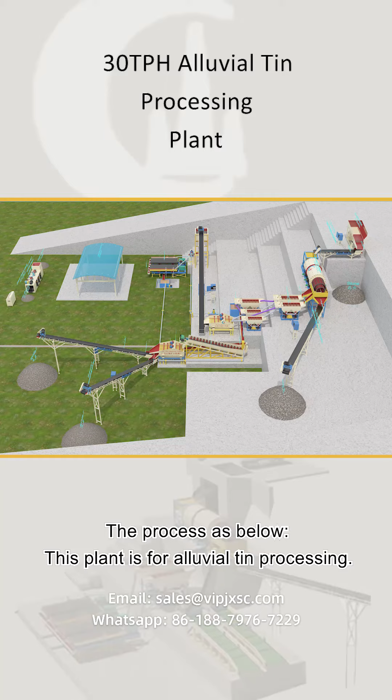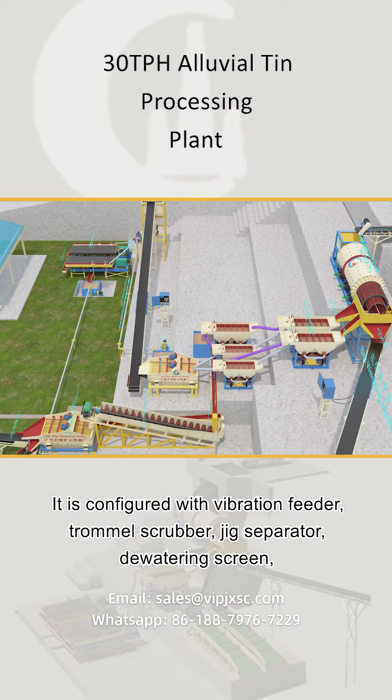The process is as below. This plant is for alluvial tin processing. It is configured with vibration feeder, trommel scrubber, jig separator, dewatering screen, hammer crusher, shaking table, spiral dewatering machine, high-frequency vibration screen, 3-disc dry magnetic separator, and belt conveyor, etc.

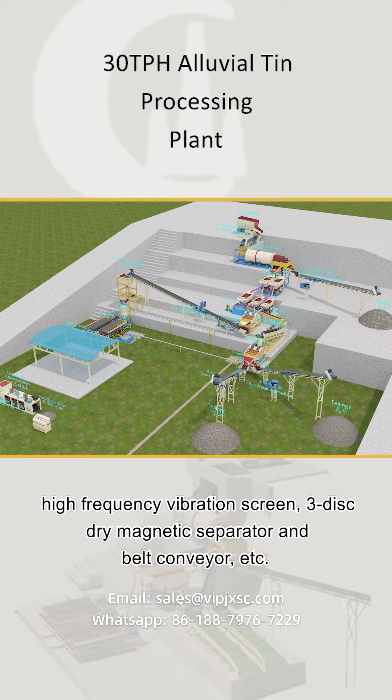This plant is designed with 30 TPH input feeding capacity. We can also design with 50 TPH, 100 TPH, etc.

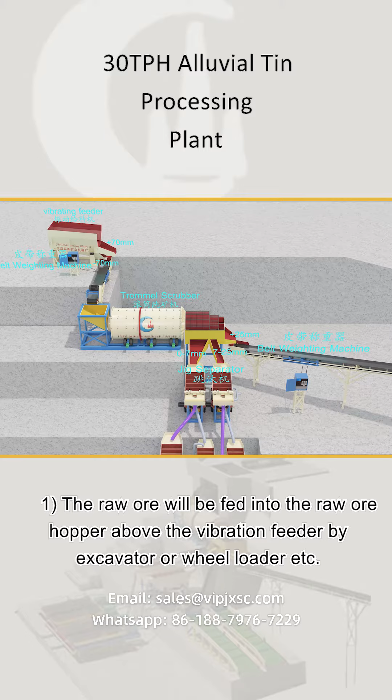1. The raw ore will be fed into the raw ore hopper above the vibration feeder by excavator or wheel loader, etc. The vibration feeder is designed with grizzly bar gap of 70 mm, which can feed material less than 70 mm into a trommel scrubber evenly.

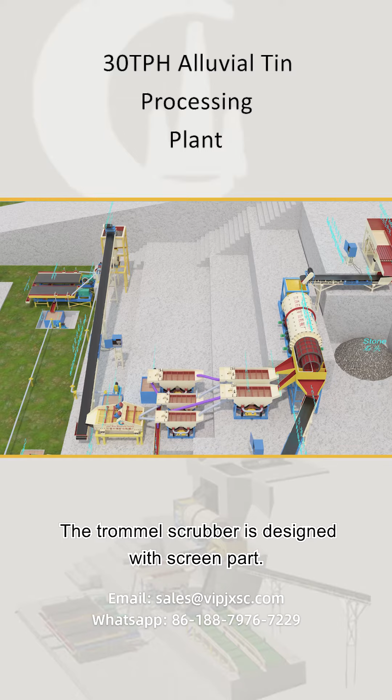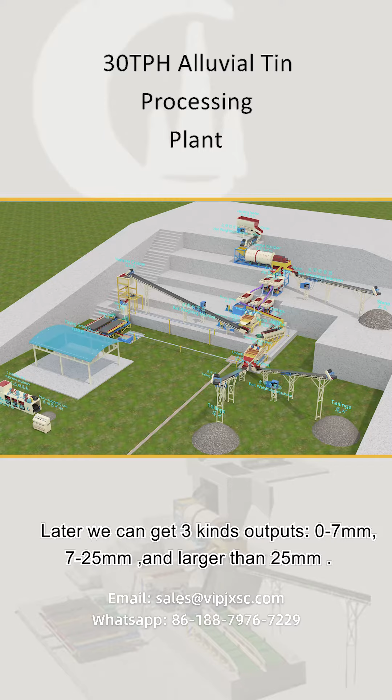2. The less than 70 mm material goes to the trommel scrubber for washing. The trommel scrubber is designed with a screen section having 2 layers of screen with aperture 7 mm and 25 mm. From this, we can get 3 kinds of output: 0-7 mm, 7-25 mm, and larger than 25 mm.

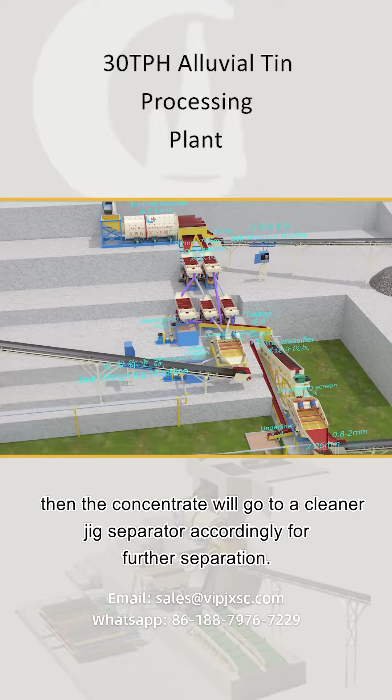3. After being washed by the trommel scrubber, the larger than 25 mm material will go to the belt conveyor and be sent to the stockpile. The 7 to 25 mm material will go to one set of rough jig separators for first coarse tin separation, then the concentrate will go to a cleaner jig separator accordingly for further separation.

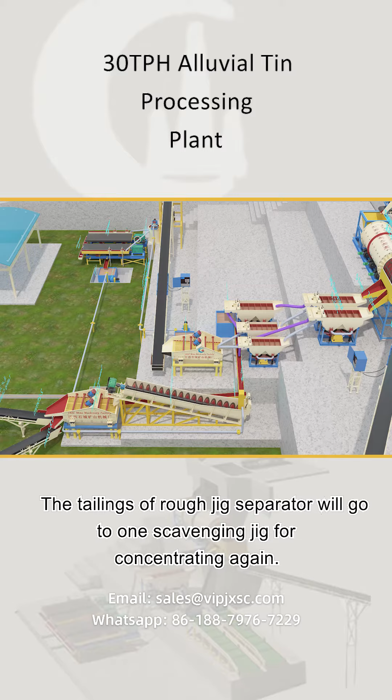The 0-7 mm material goes to another rough jig separator for enrichment, then the concentrate will also go to a cleaner jig separator for further separation. The tailings of the rough jig separator will go to one scavenging jig for concentrating again. These circulating loop jigs improve the recovery rate.

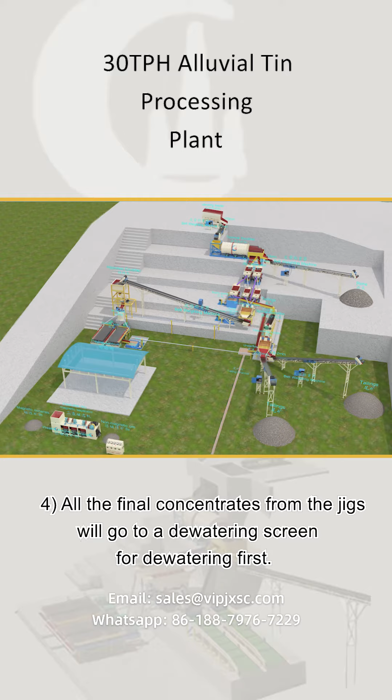4. All the final concentrates from the jigs will go to a dewatering screen for dewatering first, because there is a lot of water coming out together with the concentrates.

5. After dewatering, the oversize screen particles will go to the hammer crusher by belt conveyor. The undersize screen material will be pumped to a mixing tank by a slurry pump.

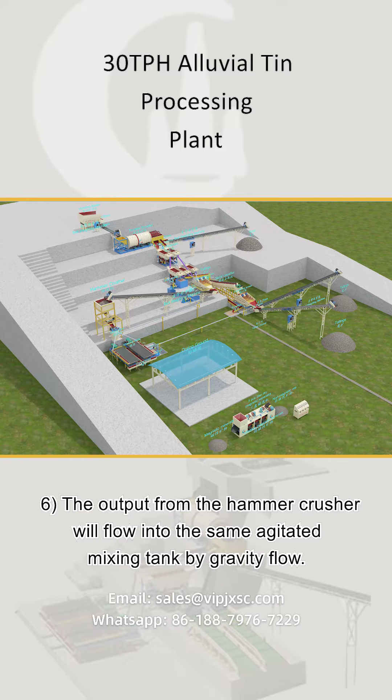6. The output from the hammer crusher will flow into the same agitated mixing tank by gravity flow. 7. The shaking table is used for further separation to get more purity tin concentrates.

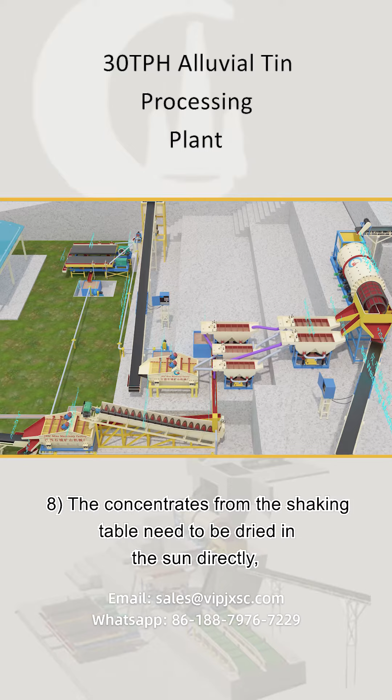8. The concentrates from the shaking table need to be dried in the sun directly. Then you can put the dry concentrates into 3 discs dry magnetic separators for refining and get high purity tin concentrates.

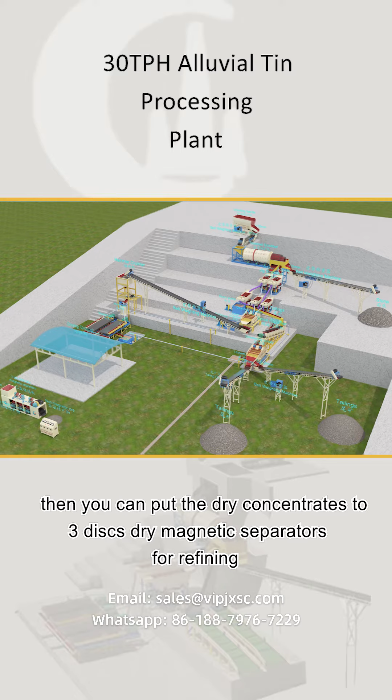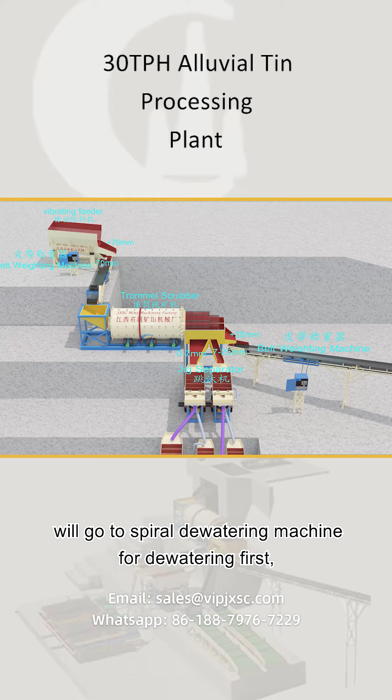All the tailings from these jig separators and tailings from the shaking table will go to the spiral dewatering machine for dewatering first, and then go to the high-frequency vibration screen for screening. Then we get the final tailings: coarse sand and fine sand, 2 kinds of product.